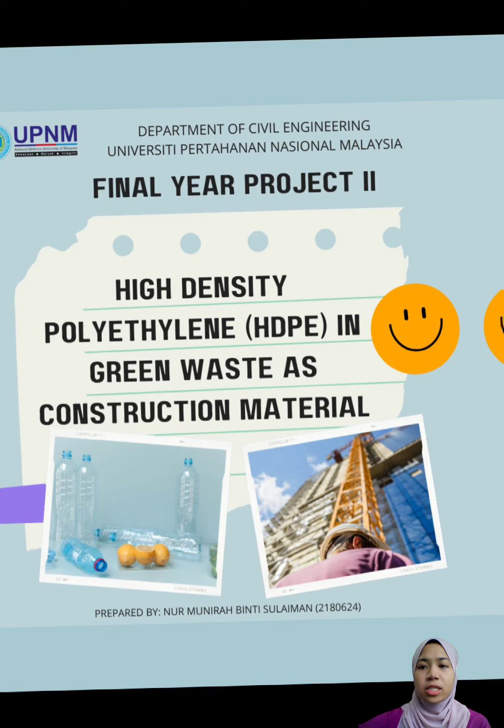Now, we go to the introduction. Plastic is an integral part of our daily life. Its production and consumption have been rapidly increasing due to its wide applications.

However, because most waste plastic does not decompose naturally in landfills and leads to air pollution, it is not environmentally safe and poses a severe environmental problem.

Plastic of poor quality, such as those used in food packaging, are rarely recycled. This is most likely why our landfills overflow with low quality plastic wrap and packaging.

As a result of Malaysia's limited ability to recycle plastic, it makes sense for us to minimize our plastic usage.

Malaysia is tracking global trends in over plastic waste creation and single-use plastic consumption, and has been the world's top importer of plastic waste since 2017.

High-density polyethylene (HDPE) has become a popular polymer widely used in industrial and commercial items today because of its characteristics. HDPE has compressive strength and high resistance and melting point.

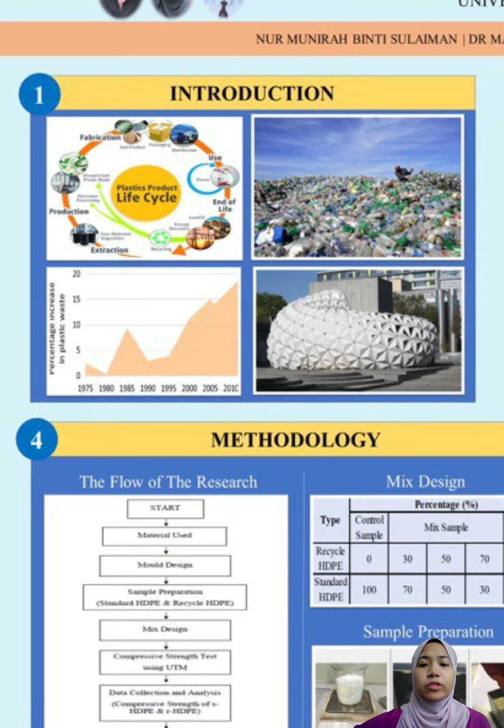In addition, using plastic to determine its compressive strength will help the industry achieve its objective. The opportunity to use this will conserve the environment and reduce the environmental threat of landfill and marine pollution.

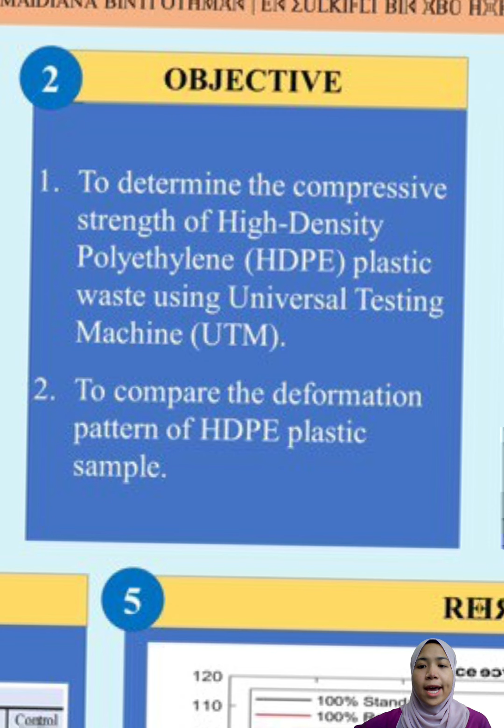The objective of this study is to determine the compressive strength of high-density polyethylene (HDPE) plastic waste using a Universal Testing Machine (UTM). Next, to compare the deformation pattern of the HDPE plastic samples.

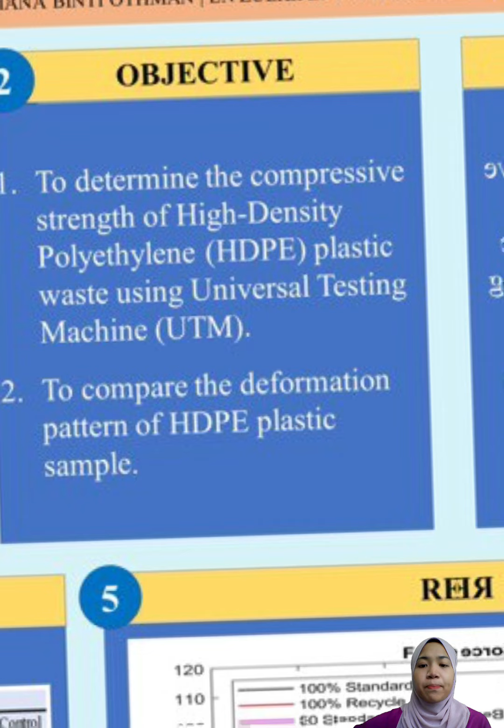Next is the scope of the study. The study of this project is to decide the size of the mold with a square shape, which is the form of testing specimen.

According to ASTM standard D1621, the standard test method for compressive properties of plastic.

Next, the HDPE will be tested using the Universal Testing Machine. It then used standard high-density polyethylene mixed with recycled high-density polyethylene following the determined percentage.

After that, the compressive test was done to examine the compressive strength of the mixture.

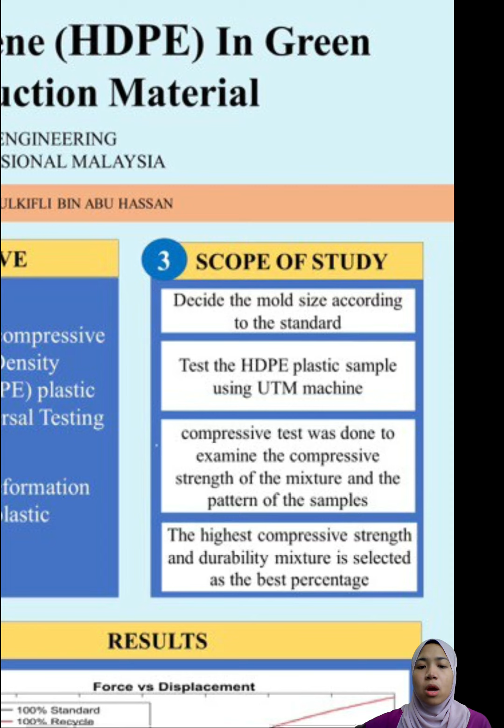The compressive test result of each mixture was tabulated. Finally, the highest compressive strength and durability mixture is selected as the best percentage and compared to the deformation of each pattern.

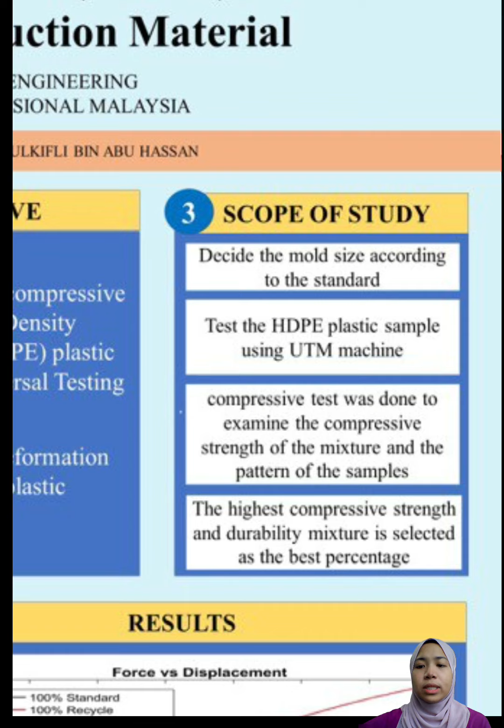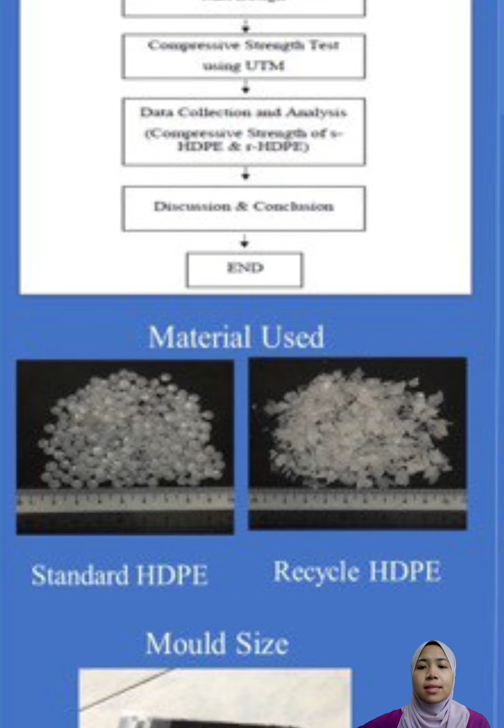The methodology of this study starts with the material used, which is standard HDPE and recycled HDPE.

There are two sizes of mold chosen in this study: 70 mm times 70 mm times 50 mm, and 70 mm times 50 mm times 70 mm.

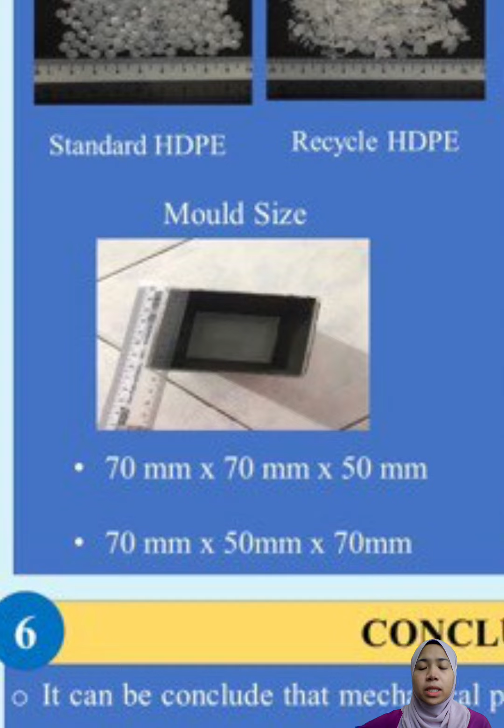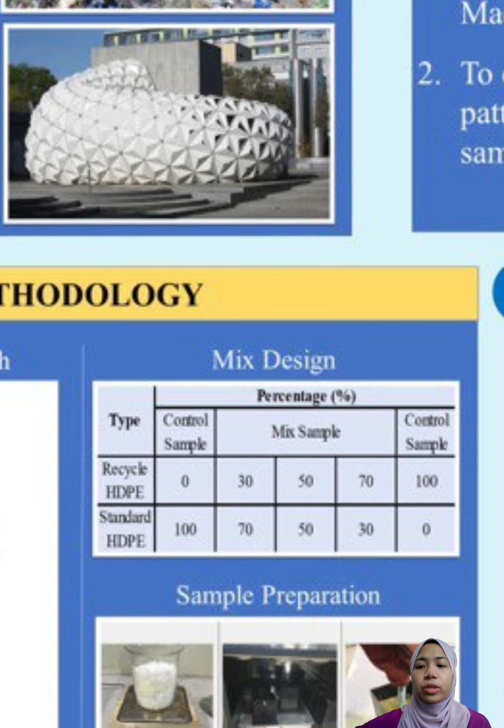In this study, there are 3 mixtures of HDPE plastic according to the percentage. The control sample is needed to ensure the test and the result analyzed are stable.

For sample preparation, using an analytical balance laboratory, the plastic HDPE obtained from the factory is first weighed according to the mix design.

Then the particles were put in the mold and heated inside the industrial oven for 1 hour at 180 degrees Celsius. After that, the plastic is then removed from the oven to be compressed to avoid holes.

The sample is allowed for a while to harden. The mixture was molded in a square shape. Next, the sample was trimmed by the milling machine to get the needed size and shape according to the standard.

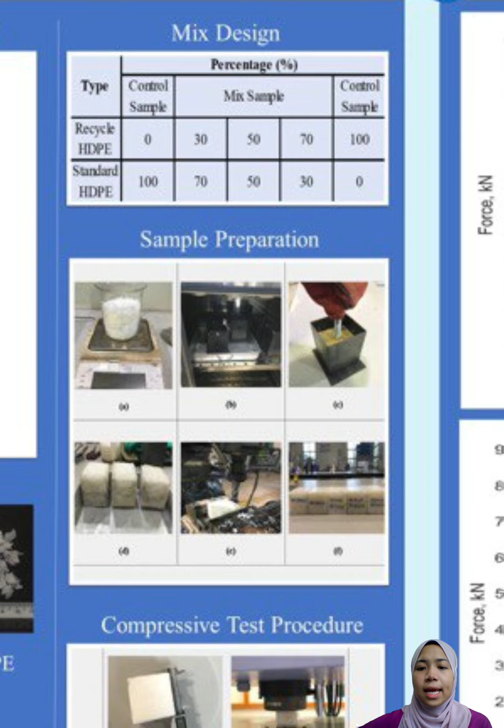The process was then repeated for 3 samples of each mix design. Finally, the preparation occurred at an environmental laboratory in UPNM.

Next, for the compressive test procedure, a compressive strength test was carried out in the structural laboratory in UPNM. The machine used is the UTM machine. The specimen was prepared as described in the standard.

Next, the sample was placed between the compression platens, ensuring it was aligned with the center line of the platen. Finally, the test was stopped when the sample was compressed by 13% of its height.

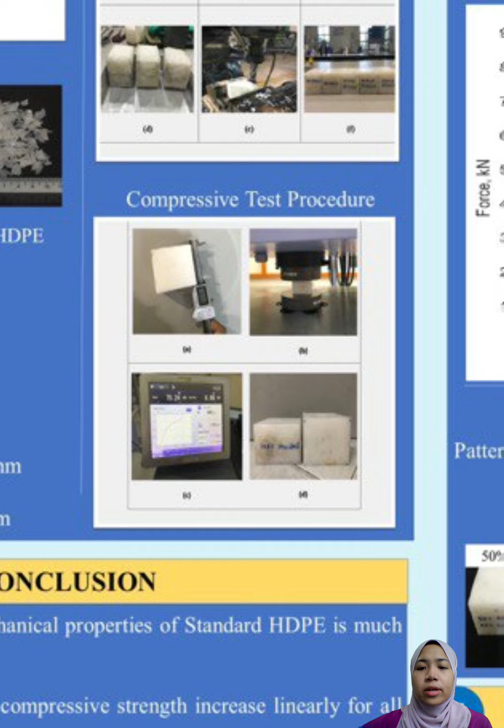The force and deformation data were recorded. Now we will go for the result.

Of the experimental analysis, the result of the experiment showed that...

The compressive test on the force and the displacement for 2 different sizes, which is 70 mm times 70 mm times 50 mm, and 70 mm times 50 mm times 70 mm.

For a sample size of 70 mm times 70 mm times 50 mm, the highest force obtained is 109.783 kilonewtons, for 100% recycled HDPE plastic.

The lowest result obtained is 79.937 kilonewtons for 100% standard. While for the 70 mm times 50 mm times 70 mm sample, the highest force was also obtained for 100% recycled, which is 80.48 kilonewtons.

So we can see that the 2 different sizes do not affect the sample strength.

Next, we will look at the average compressive strength from the HDPE sample test. It can be seen from the graph that 100% recycled HDPE has the highest compressive strength among other mixtures and performs the best.

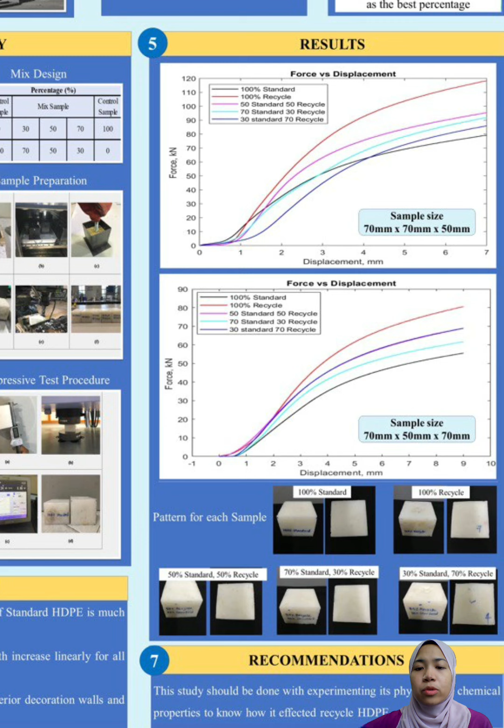Next, a few of the deformation patterns for the HDPE sample are shown in this figure. After testing, we can see that all the samples have the same pattern and don't show a change of pattern.

Because it's only compressed at 13% of their original height.

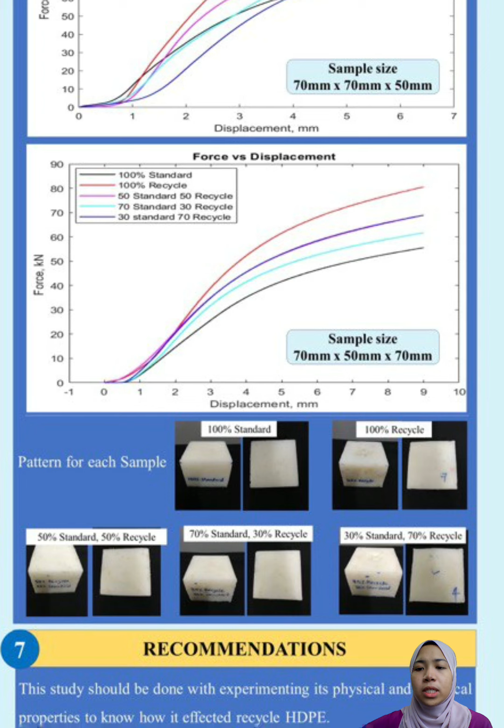The conclusion from this study is that the mechanical property of standard HDPE is much lower than recycled HDPE. Secondly, the 2 different compressive strength sizes increase linearly for all mixtures.

Lastly, the plastic block can be used to replace interior decoration walls and partition walls as a construction material, so that we can save the use of stone, sand and other construction materials because of the price and because it is more environmentally friendly.

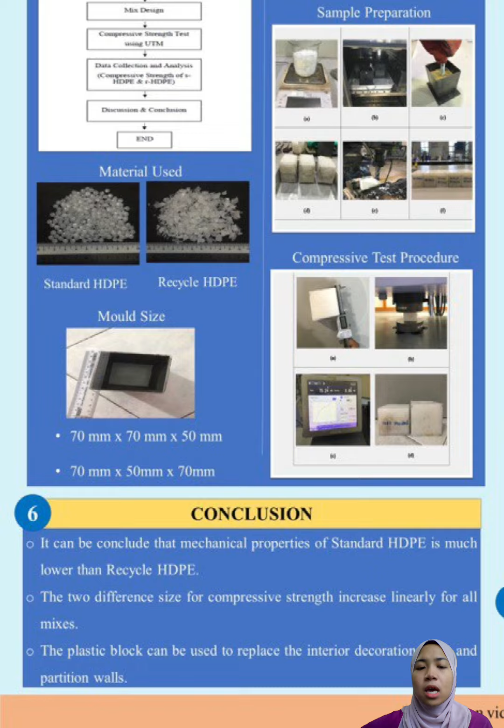However, a recommendation can be made in this study, which should be done by experimenting with its physical and chemical properties to know how it affects recycled HDPE.